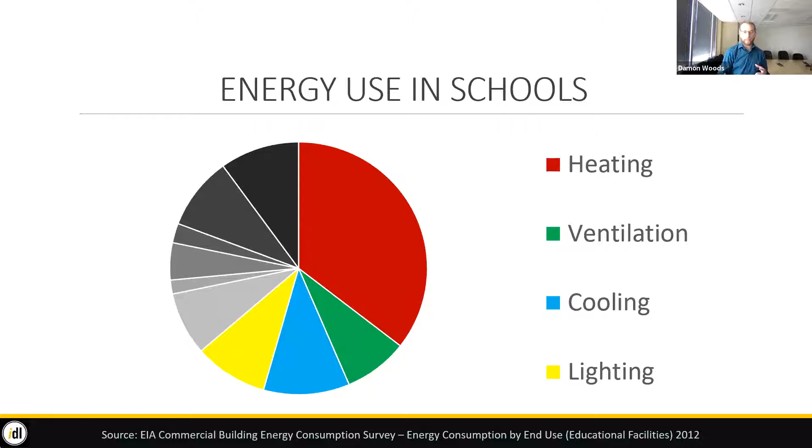But if we look at those, 4 key indicators of temperature, lighting, ventilation, noise, they overlap pretty evenly with energy use in terms of schools. The majority of energy use in schools goes towards HVAC, heating, ventilating, and cooling, along with a fairly significant portion for lighting. So by making classrooms that are good, we can also make them efficient, and they don't have to be in competition with each other, although they can be.

So looking at criteria number 1, temperature. I'm coming from an engineering background, HVAC's my specialty. I'll try not to talk ad nauseum about this, but I believe it's very, very important and often overlooked within classrooms. Thermal discomfort can really affect not only mood, but also student performance.

So there is a German magazine called PLoS One. It's their European equivalent to our journal Nature. So it's the big one. And a big study came out in I think it was 2019, on how students performed at the same math test given different temperatures within that classroom. And what they found was that by raising the temperature by 2 degrees, you could actually affect math scores by 2%. So that's showing a one-to-one correlation, causation actually, of comfort and thermal conditions affecting student performance.

I think we know this intuitively. If we're shivering, we're not going to be paying attention as well. If we're sweating, we're going to be falling asleep. But like I said, there are a number of studies out there that actually have the data to back this up. So maybe you're an architect, maybe you're an engineer, and you're designing these classrooms, or you're responding to a bid from a particular district.

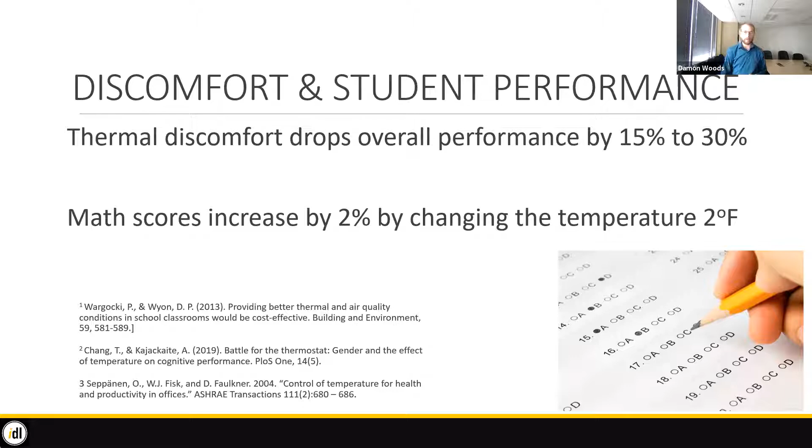You may know this intuitively, but I hope this presentation can actually give you some references to bring to the table to really argue for better HVAC equipment, increased zoning, increased temperature control within the classroom, because it really does affect student performance. And that's what we want our buildings to be, is good performing.

The other thing is that it's our thermal comfort sensation. If you've listened to me talk about radiation before, you know that the surrounding surface temperatures actually have even more of an impact on our sensation of comfort than the air temperature. And so if you're in a classroom, maybe it's an older school in a rural environment, and it still has single pane windows, if it's 0 degrees outside, the interior surface temperature of that window is 15 degrees. Whereas the thermostat might be on the other side of this classroom, and it's reading 70 degrees.

So air temperature might look okay, but what's actually going to be happening within the classroom is you're going to feel a draft down here. You're going to get these convection cells as that air sticks to that cold surface and then falls down on these students. They're also going to be feeling the radiant exchange, kind of losing heat to that cold surface. So this makes an unequitable learning environment. The students at the perimeter here are actually at a disadvantage to the students that are closer to the interior.

If we look at a double pane window, more code standard, that surface temperature when it's 0 degrees outside is still down at 45 degrees. So that's a 25-degree temperature difference with the air. So you're still going to get some convection cells in here and still get a sensation of a draft, even if that envelope is pretty tightly sealed. So, it's less dramatic than a single pane window, but still really affecting those students.

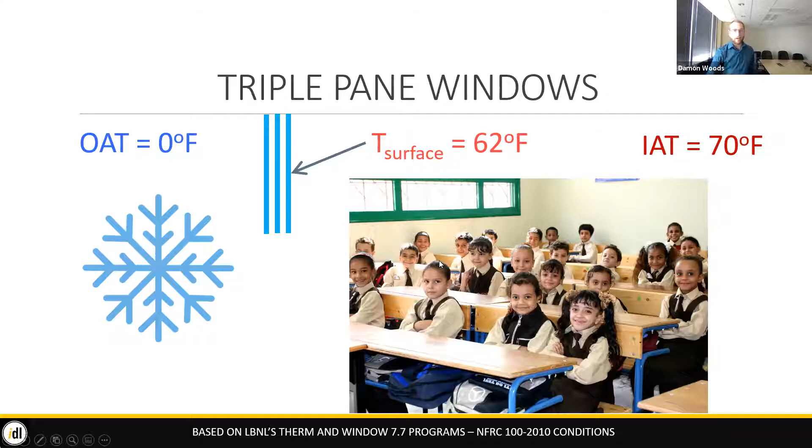By the time you look at a triple pane window, something that might come across in like a passive standard, the interior surface temperature of that window is much more closely aligned to the actual indoor air temperature, meaning that the radiant exchange within this place is more even, and it's a much more equitable learning environment. So if your son or daughter is assigned a seat next to the window, they're no longer at a disadvantage during those cold winter days. So just something to keep in mind.

I really try and bring this down from just sensations to actual quantities. So how do we quantify thermal comfort? ASHRAE standard 55 has that predicted mean vote. So you want to be in the Goldilocks range at 0. If you're in the negative range between -0.5 and -3, that's cold.

And if you're in the positive range above 0.5 and up to 3, that means you're too hot. And that has a direct correlation with the percentage of population that's dissatisfied. So if you get to a PMV of 1, that corresponds to 25% of the students or the occupants in that space being uncomfortable, which is going to affect their learning and their performance.

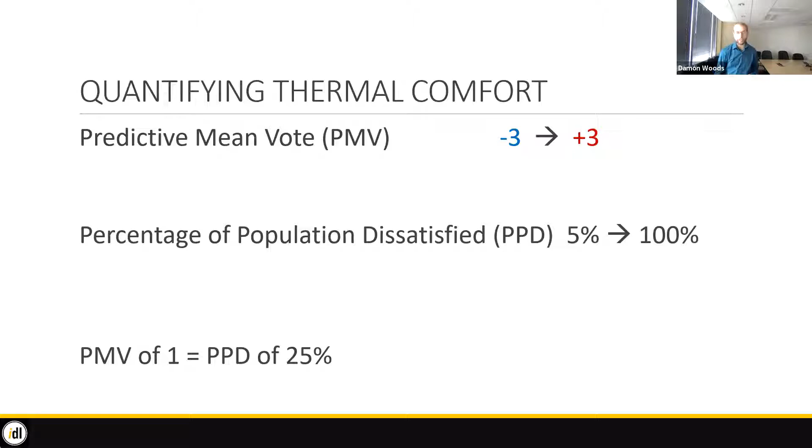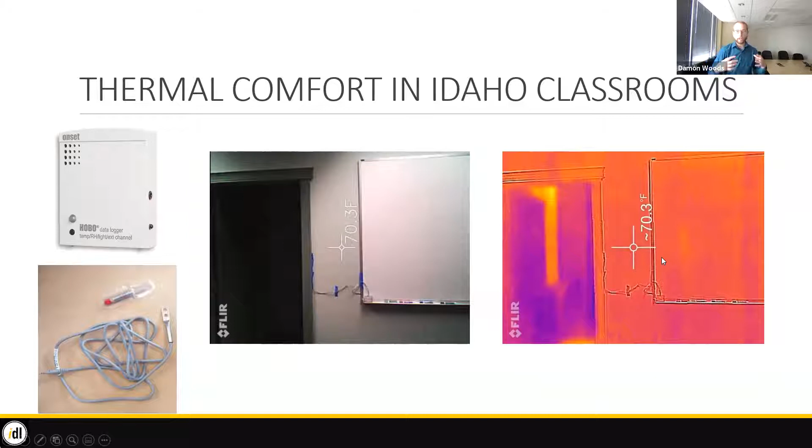We were fortunate enough through Idaho Power to do a survey of a few different high school classrooms within the valley. So instead of looking at just thermostat readings, we looked at air temperature, relative humidity, air velocity within the room, and surface temperatures to really quantify holistically how these spaces are doing. And what we found is that on average, they were far too cold.

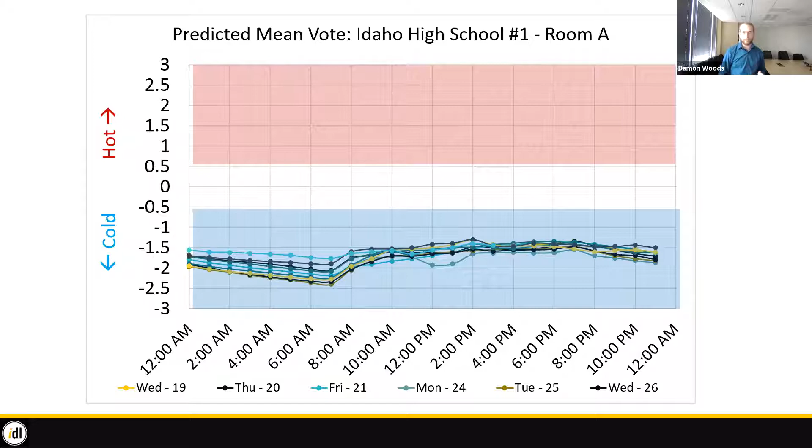When we entered the student activity, their clothing levels, and took all of these factors into account, we were far below that predicted mean vote of -1. So a third to a half of these students are predicted to be chilly within this environment, which means their blood circulation is going to change. They're going to have less dexterity in their fingers, maybe a little bit slower at writing. All of these things matter.

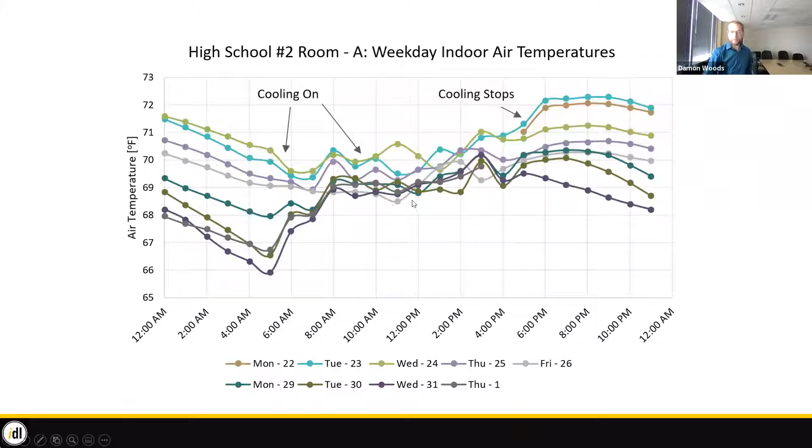And you might say, well, they should just put on more sweaters. Well, the thing was, we did this during the fall, the early part of the school year, when it was actually warm. And so the air conditioning was actually coming on, and we could see this from our data. The AC units would kick on in this particular classroom and keep it uncomfortably cold, spending extra energy until the end of the school day, at which point it would rise.

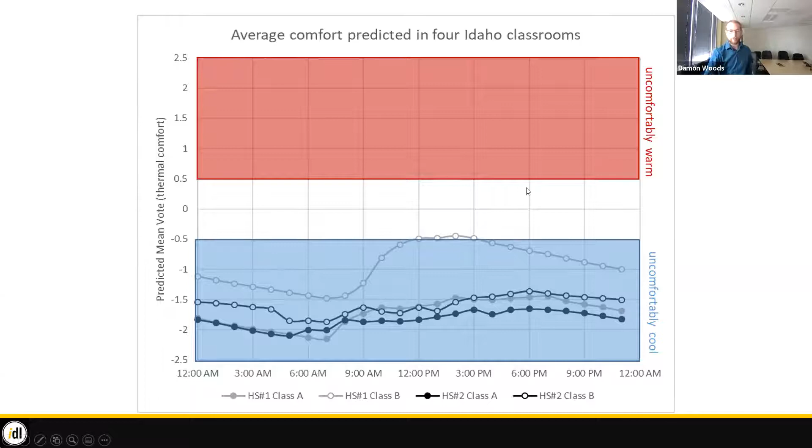So this is looking at 4 different Idaho classrooms. There was one that drifted into the semi-comfortable range. Pretty much all of the rest were down in that cold range, using extra energy to keep the students particularly chilly. So we did offer some alternative cooling set points.

The biggest one that should be noted, especially for facility managers or engineers in their designs, is instead of having a hard start of when your cooling should begin right at occupancy, all of those surfaces are going to be much cooler in the morning before students arrive and start heating up the desks and the walls, and you turn on computers and projectors. All that takes a while to build up, but remember that we're more attuned physically to the surrounding surface temperatures.

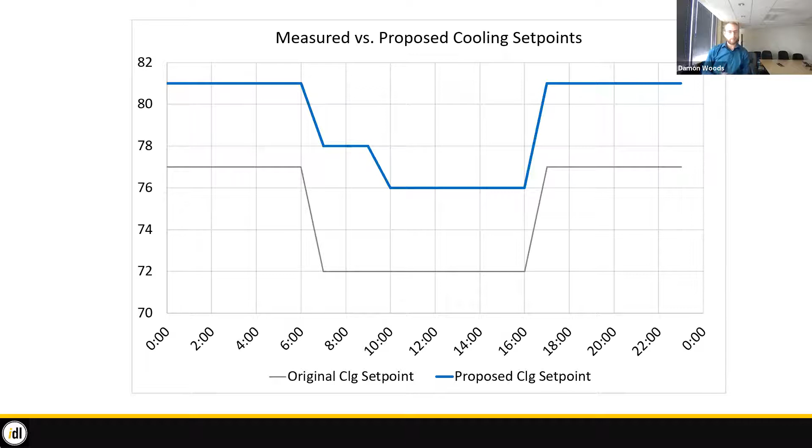So you can save on cooling energy, one, by just raising the thermostat set point, but even more significantly by pushing that cooling set point to not happen quite so early in the day, but maybe a little bit later, maybe by period 2 or 3, when those surfaces start warming up. That's when the kids could really appreciate that cooler air. But in the morning, you're just going to be freezing them to their desks, and there's no need for that.

All right, so that covers criteria number 1. And criteria number 2, I'll also spend a bit of time on this one because it's highly relevant, is air quality. And good ventilation, like I said, has a measurable impact on how well students concentrate, how well they do on tests, how good they are at making decisions, how fast they are at completing assignments, and especially importantly, decreasing absences by removing more germs from the spaces themselves.

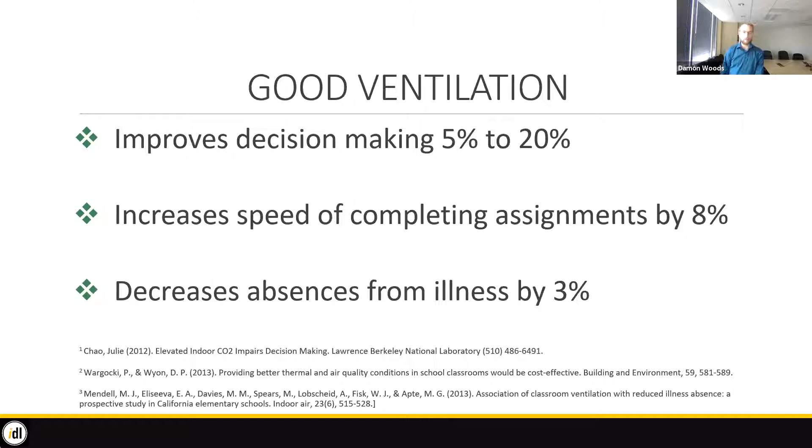Right? So there are many more studies than these, but I wanted to highlight some of the ones that have come out in the last 5 to 7 years. I put together this slide in January of 2020, so that's weird. You know, it's very important now that we try and get rid of germs within our spaces. But there's also other factors at play.

There's volatile organic compounds from any time a classroom has been repainted or recarpeted. If the school windows are open next to the pickup line or where the school buses are, that exhaust might drift into the classroom, or you might have your makeup air handlers too close to where those automobiles are lining up. And if you don't have enough ventilation within the space, even just kids breathing at a higher rate will raise the carbon dioxide levels. Not that carbon dioxide is going to harm you, but our bodies really respond to that.

Yeah, I'll mention that in a minute. But so it used to be ventilation was entirely based on bioeffluents and just smells alone, of how bad is somebody's BO. Thankfully, we're a bit beyond that, and we're getting more into quantifying indoor air quality based on carbon dioxide measurement.

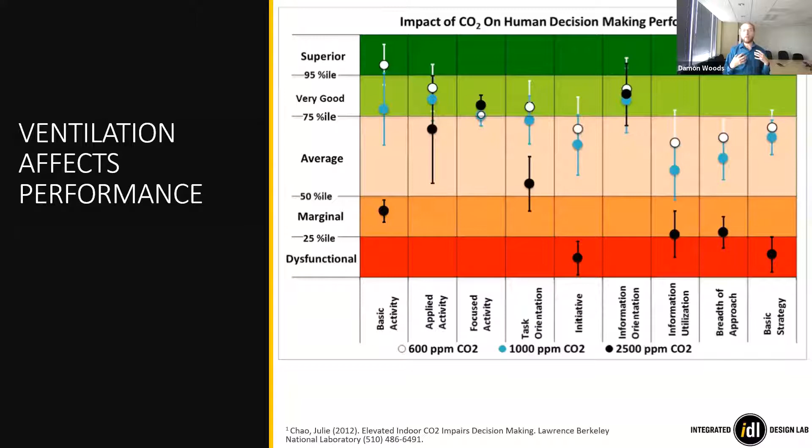So even if you do have enough oxygen within the space, if you have too many people breathing and you're not flushing that out with fresh air, it's really going to affect employee performance within your offices, but especially, I think, kids, which have a faster metabolism and a higher lung to air kind of ratio in terms of exchange. They're more attuned to this. Their bodies are, and so it's pretty important.

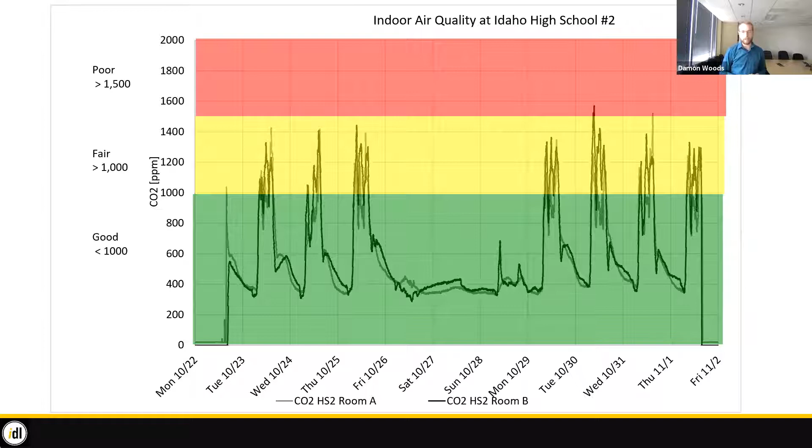But when class is in session, it's definitely spiking and kind of a little bit into this red range above 1,500 parts per million. Not dangerous, but just not great and not ideal for really getting the most concentration and performance from the student in terms of their learning environment. Unfortunately, this was one of the better classrooms that we saw. This was a separate classroom, and our meter cannot go higher than 2,000 parts per million. So we were capping it out pretty much every time class was in session there.

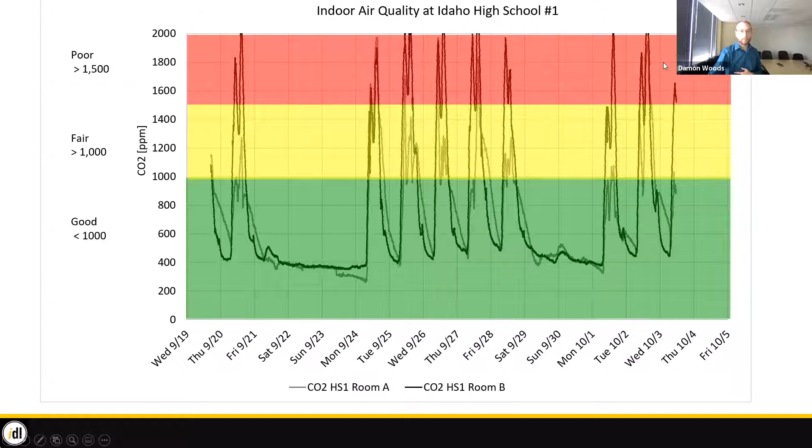But these sensors can be a little bit of a headache for facility managers, for school managers. I had a conversation kind of off the record with another engineer who said he was trying to put in CO2 monitors at a school in Idaho, and the facility manager said, you can install those. I'm going to take them out because I just don't have the funding. I don't have the time to run around and hit all of those beeping lights because they fail often. They need to be recalibrated every year.

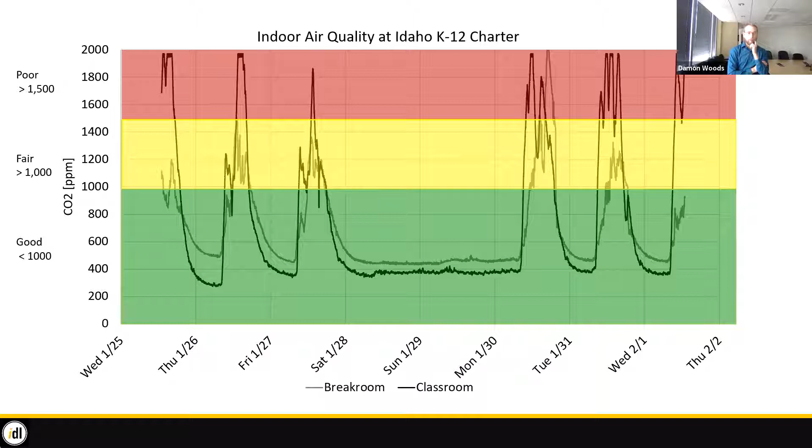All right, now this is kind of when ventilation and health start overlapping. I want to spend just a minute on this, but it's very relevant. Boise School District, I think, has put a pause on a lot of their capital projects in terms of new school buildings, and instead they're redirecting their capital resources towards HVAC upgrades and really addressing this.

And there's a few different ways to go about it. Thankfully, ASHRAE has come out with a few different guidelines for building operations during COVID-19. They are free resources that are available online. I'll highlight some of the findings, but know that while this is still new, we're watching science happen in real time, we're still doing tests and surveys. We don't have all of the answers, but we have some ideas based on past SARS research and things like that.

I would also highly recommend checking out Kevin Van Den Wymelenberg's talk, which is available on our YouTube site. He's leading an incredible team over at University of Oregon, the Energy Studies in Buildings Laboratory, and they're doing a lot of literally cutting edge research on COVID and HVAC and how it's being transmitted through buildings. So just Google his name and look at some of his resources as well.

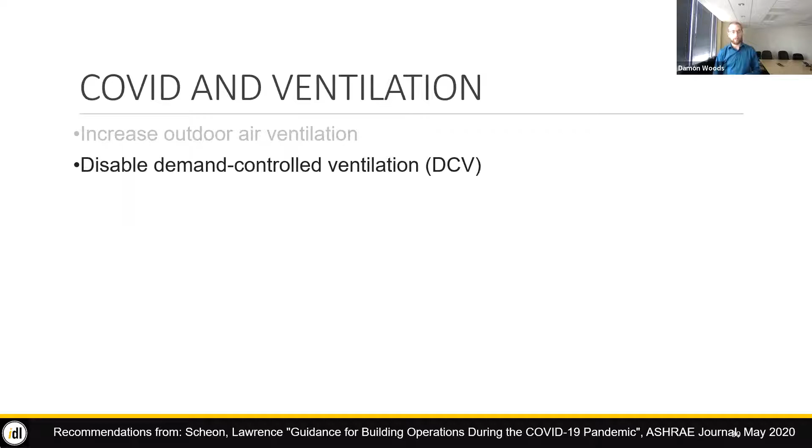So instead of just relying on CO2 levels, just open up the dampers as much as possible. So, open up that minimum outdoor air that might be at 30% to up to 100%. Bring in 100% outdoor air if possible to limit the amount of recirculation that's happening within your HVAC system, especially if you've got rooftop units or variable air volume systems.

Like I said, though, there might be some issues in terms of can you actually handle that load within the building? Typically these units are sized to mix the air and only have a little bit of that super freezing, 20-degree air in the mornings, and then the majority of, say, 70-degree air. Well, that recirculation might carry some germs. We're still figuring that out.

CDC has now officially come out and said, yes, COVID is an aerosol. It can be transmitted through evaporated particles, and it can go through an HVAC system. We don't know if that's primary transmission for, pardon me, it's a little too relevant. We don't know, it's probably not the case that that's the primary mechanism for transmission. It's probably more easily spread through droplets, if you will.

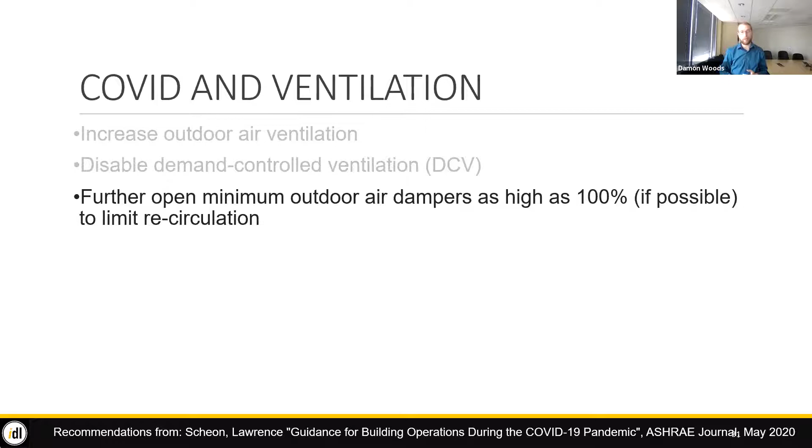But in terms of just trying to be as safe as possible, the more outdoor air you can bring in, the less you're recirculating any spit or aerosols, the better. If you do recirculate air, then you can increase your filters to MERV 13 or the highest compatible with your filter rack, and really try and seal the edges around that to limit the bypass.

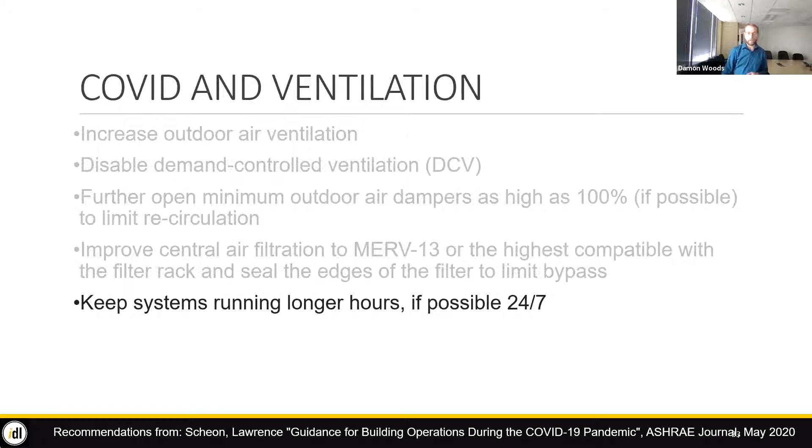Doing so can affect pressure loss within the system, increase fan energy, and it takes some testing and balancing. And I believe that's something that a lot of the local school districts are doing, but it does come with energy and airflow consequences. So just be mindful of that. And then keep these systems running longer, 24/7. So we're just continually pulling air out of those spaces, not letting germs just kind of settle and build up there overnight. Also consider a portable room air cleaner with a HEPA filter.

These can be great. They can also be a little bit noisy, and they do come with an energy impact. But there has been some data to suggest that HEPA filters can block COVID particles. You can also consider adding ultraviolet germicidal irradiation, UVGI, into the return duct. So you're basically zapping everything and trying to kill it before it might get recirculated into the classroom.

One I didn't mention on here is needlepoint bipolar ionization. There haven't been too many studies on that yet. There's a few that show promise, but like I said, we're still figuring this out in real time. It's going to take a while till we get multiple peer-reviewed studies. There's a couple out there, and it looks promising, and it comes with fairly low energy penalty, but there's more investigation to be done right now.

Some people are throwing kind of all of these things at the building. Some are choosing what they can. I don't know that all of these are long-term solutions, but for getting through this particular year, I think it's important.

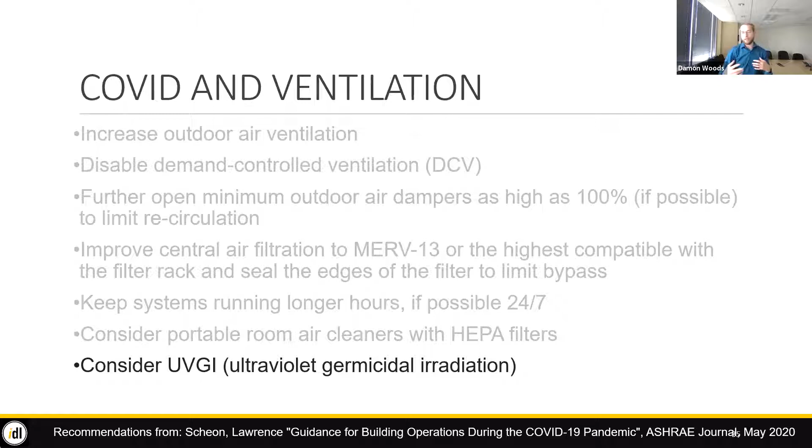The state of Washington has implemented this and required it for all their educational facilities, I think in their 2015 or 2018 energy code. I would love to see Idaho start looking at adopting something like that for classrooms. We're not there yet, but if you're designing right now, this would be a good time to consider those options, which might cost more upfront but save energy long term and address these recirculation issues. All right, I'm off my soapbox for now.

All right, comfort criteria number 3: light. Good daylight really reduces seasonal affective disorder. It's a real thing—if you don't think so, just live through another Boise winter with an inversion.

There's also good correlation between student test scores and good daylight within the space, as well as increasing math and reading speeds. I don't know how many of you read in dim light, but I have a bad habit of doing this, and by the end I'm squinting, my eyes are tired—my body is spending extra energy to process the same information. Same if there's bad glare on a whiteboard and you're squinting, trying to follow along, but all your energy is focused not on what that person is saying but on trying to decipher the words.

So this comes down to lighting design and making sure there is good quality daylight within classrooms. We also know good daylight can have an effect on the indoor biome and the germs that are in there—we know COVID is not a huge fan of sunlight.

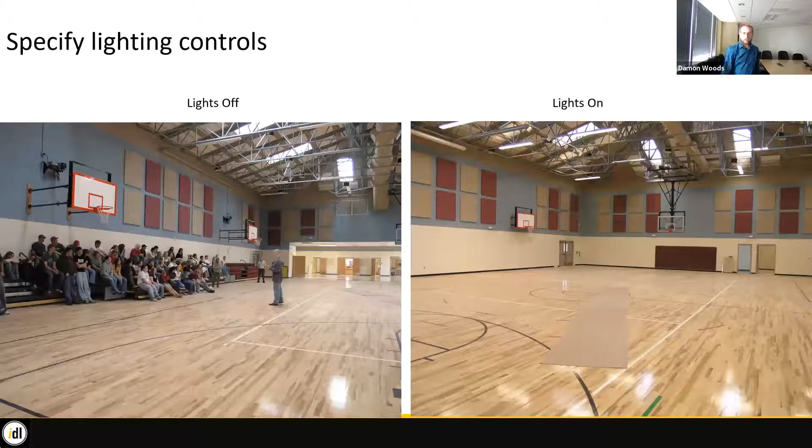Lighting controls: if you went to the trouble, especially in a gym, of adding skylights, which is wonderful, and don't actually specify any of the lighting fixtures to have photocells or to be able to dim when they're unneeded, you're going to be spending a lot of extra money, not only to run the lights, but also to remove all the heat generated by those lights and distribute that air. So make sure that lighting controls are specified within the plans when you are submitting it.

All right, last but not least is noise. Our ears develop the ability to pick out individual voices over time. It is not necessarily intuitive; it is a learned response.

If there is a lot of background noise, I apologize to everyone listening online right now. I am in a room with a lot of floor vents, and there's a lot of pressure and airflow coming out of it, so there's that background hiss. Hopefully the microphone is hiding some of that, but it's slowly giving me tension in my neck, and I feel like I have to speak over that.

Kids not only have to deal with background noise from fans, but also hallway interruptions, or if you have open windows, a thin envelope, single pane windows, leakage within the envelope, or thin walls, they are having to spend extra effort and mental energy to focus on what the teacher is saying, as opposed to simply listening without those distractions. Because it's a learned response over time, this particularly affects young kids and those who maybe don't have the 20/20 equivalent of hearing.

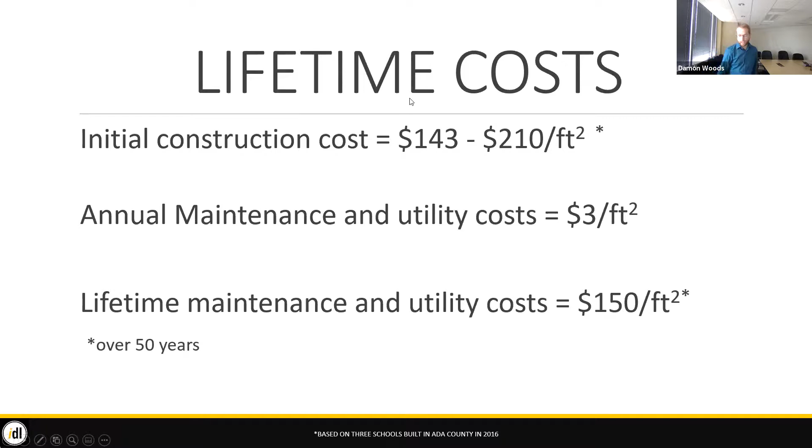So I looked at three different schools that were constructed in Ada County in 2016. Their initial construction costs range from $140 to a little over $210 per square foot, whereas their annual maintenance and utility costs were at about $3 per square foot. But if you look at a 50-year building, the lifetime maintenance and utility costs is close to that initial construction cost. And you might say, well, 50 years is way too long for a building.

Well, let's look at some elementary schools and high schools within the Treasure Valley. Highlands Elementary is 59 years old. Capitol High, that building's 55 years old. Taft is 109. All of these schools are pushing well beyond that 50-year limit. And so those operation and maintenance costs, if we can reduce them, that's really going to make a really big difference on that long-term budget.

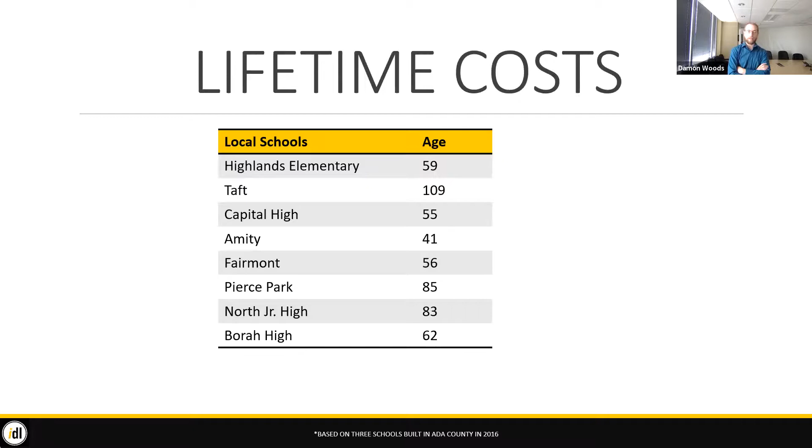So they wouldn't have to do as many special levies, fingers crossed, in the future. This is coming out of a lobbying group, so take it with a grain of salt, but the Greening America's Schools program found that a 2% building premium led to a return on investment of 20 to 1.

The top, least fuzzy number, I should say, is a $9 return per square foot in terms of energy implications. So if we kind of go beyond code in terms of better HVAC systems, better lighting, then there can be that long-term return on investment.

They also really found, and they pushed this number a lot, the increased earnings over the lifetime of the student that actually goes there, in terms of their tax revenue in the future. You can quibble with that number, as well as say, and this is pre-COVID, cold and flu reduction, asthma reduction, teacher retention, but these are real things. And maybe this is skewed too much in terms of being overly optimistic on the benefits, but I think there is a real financial case to be made for spending a little bit more now for better learning outcomes down the road and less energy bills that have to be spent each year.

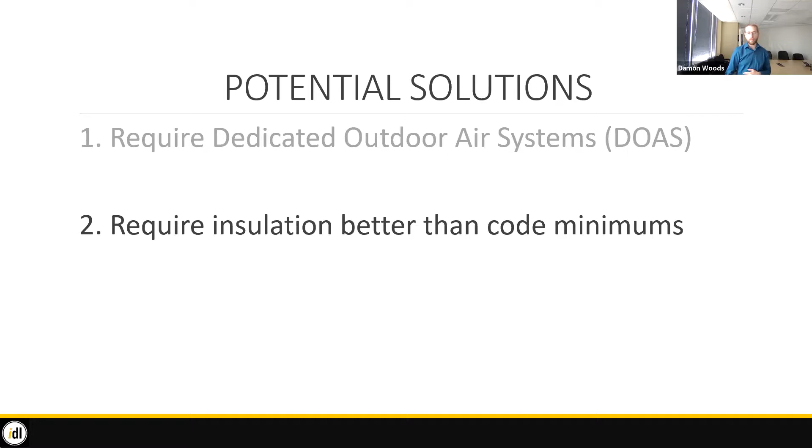So don't ignore those, seek those out. And really set an energy goal for the school. Don't just say the school has to house so many students. Speak with the board, speak with whoever's putting together that RFP about long-term, what are those operation and maintenance costs going to be over at least a 10-year lifespan, all the way up to maybe a 50-year lifespan, and really look at the long-term financial implications of going the cheap route now and spending an arm and a leg on heating and cooling the next year.

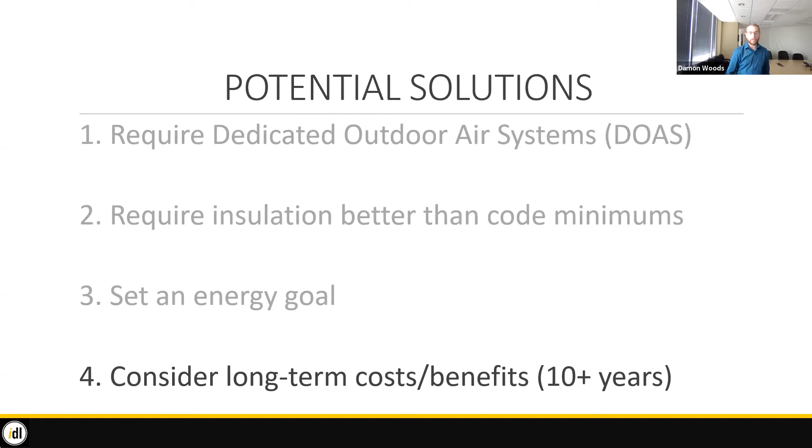So just really focusing on that last point again, really consider the long-term costs and benefits to the design. And it's not like we don't know how to do this. There are great design guides out there. There's the New Buildings Institute, Getting to Zero.

Not that you have to get your building down to net zero. I mean, that's awesome, I applaud you, but we probably can't do that in our current budgetary frame unless you're a super fancy charter school. They have those in Sun Valley. That's awesome. But at least use it as a starting point for some of the design.

As well as the Achieving Zero Energy, Advanced Energy Design Guide. I believe this is out of ASHRAE. These are free resources. If you don't have them or can't find them, let me know. Our lab can help direct you to them. Our lab can help on design charrettes. I'm really passionate about this.

I'd love to see our schools do better within Idaho. On kind of the more political side of things, or just really enacting some of these changes as designers, as engineers, talk to school board trustees, talk to other people in your community, talk to other parents within your school, or write a letter to the editor and let them know about the long-term energy costs and the benefits that can be had by really building better upfront for a classroom that is thermally comfortable, that's well lit, that's quiet, and is healthy, that has really good ventilation.

All right, thank you all very much for your time.